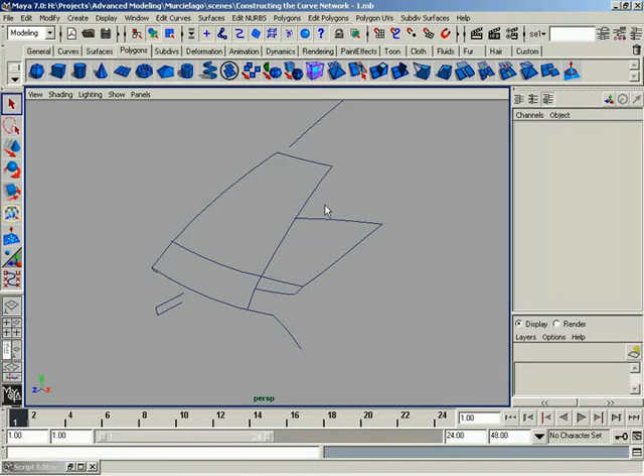Okay, so let's keep on building our curve network. All right. Now, I did notice at the end of the last video that I was losing a little bit of continuity with some of these curves. These should be straightened out a little bit more than they are. So I'm going to take just a few seconds and grab CVs on these curves and clean things up a little bit.

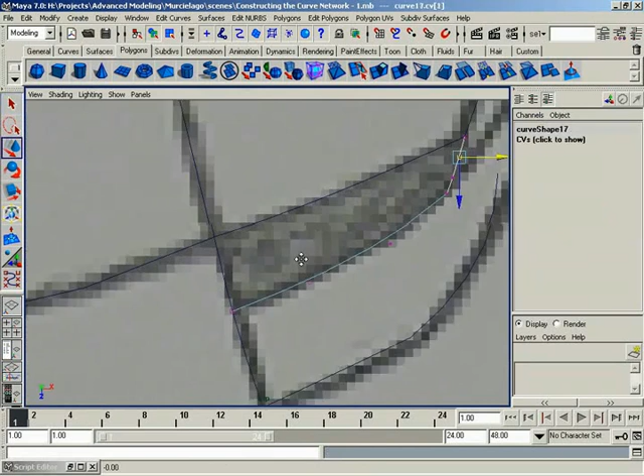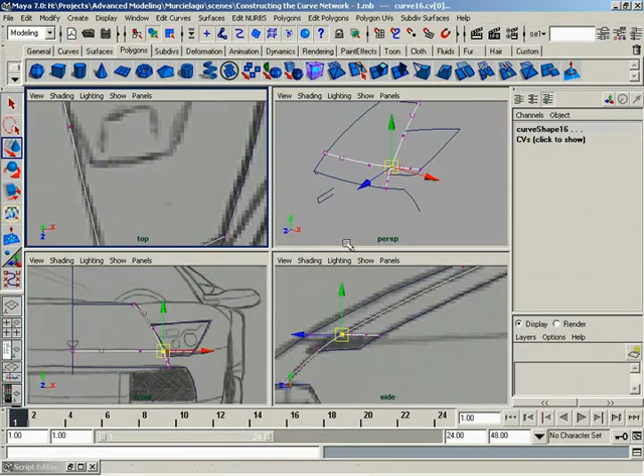Say over here, grab all 4 of these. Grab their end CVs and just kind of straighten that out. Okay. And let's grab the CV curve tool again and start working on the fender. And adjust in the front view a bit.

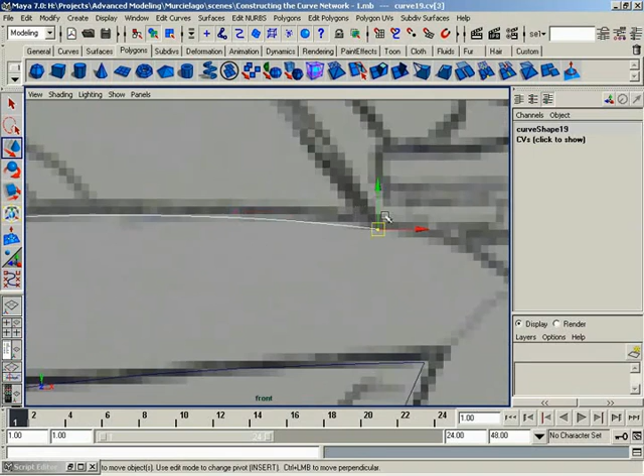Take a look up here at the front of the car. We have this kind of lip that goes up underneath, and down here on the edge. Let's go ahead and see if we can create that. So right around the grill? Yeah.

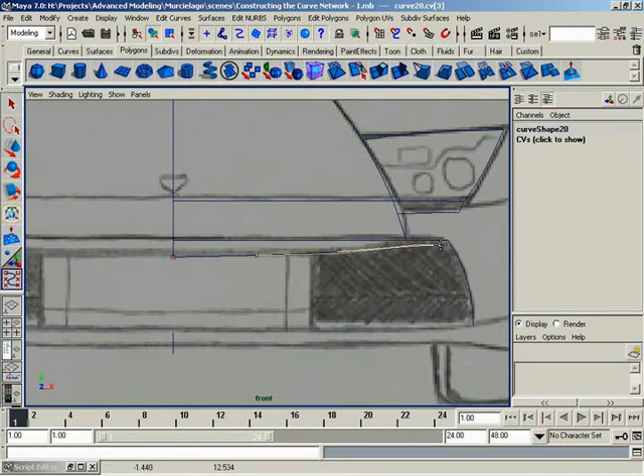And we're going to use the arrow keys and pick walk along the curve. In fact, let me double check here. It looks like I grabbed 2 CVs when I didn't really mean to. And let's just kind of double check on the image. We can see this area here, and it kind of slopes up there at the edge, so we'll leave that kind of pointed downward just a bit.

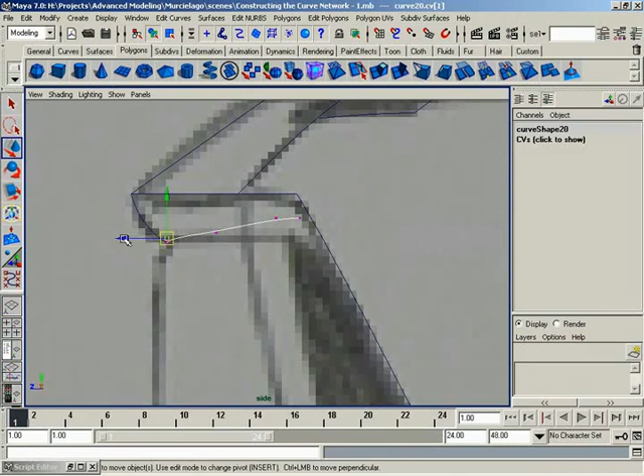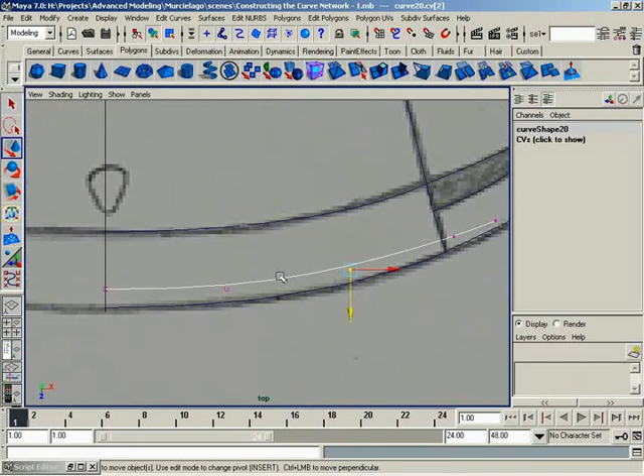And this is the second to the last CV, so what I'm going to do is make sure that it stays aligned with the first one in the Z-axis, so it'll stay nice and flat along there. Now what I'm doing here is I'm just kind of rounding this out based on sort of a best guess, if you will. Go into the top view, follow the flow of the curvature of the car, and just kind of make it look nice, is what that kind of amounts to.

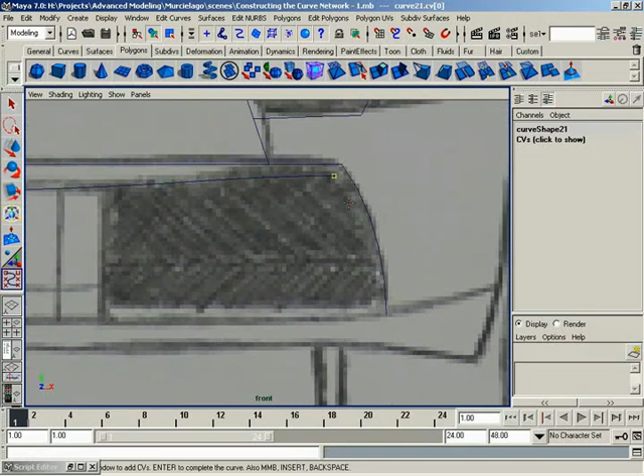All right, let's go back to the front view. Could probably tug this out just a little bit further. These can go up just a bit. Create another curve like so. Now, what line are you following? I don't see... There really kind of isn't one. But check it out. There's a little bit of thickness here. Oh, I see. Okay. That I just want to kind of get in place. So I'm just creating sort of a guideline.

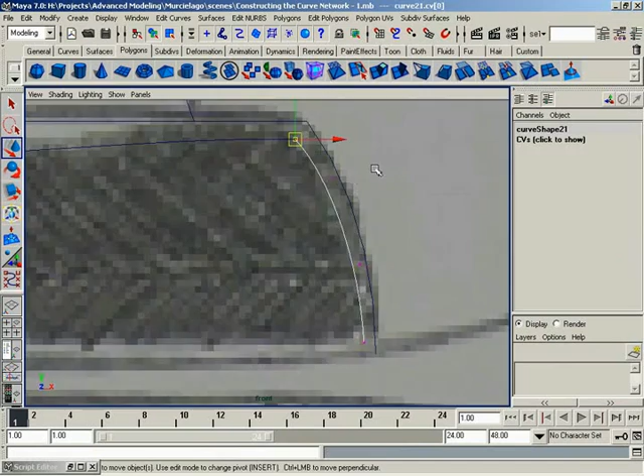As I was saying, there's kind of a difference between lines that you'll actually see on the model and then lines you're going to use for contour purposes. So this is just giving me something to base things on as I step inside. Because what I'm going to do is pull this all the way back a little bit behind that lip. You see, it's just a way for me to kind of keep track of the contour of the car. Oh, I see what you're saying. Okay. Kind of giving it a thickness. Yeah, exactly.

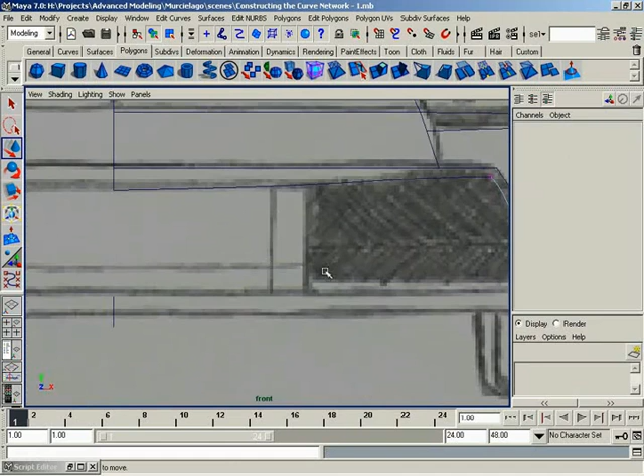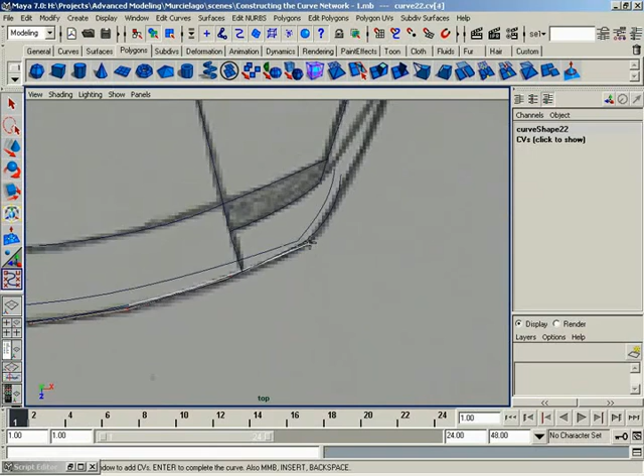So let's see. Up here along the front, we kind of curve outward. Now, this is sort of an interesting area. I'm going to snap right up here to the front edge of the bumper, if you could even call that a bumper. And we're just going to follow this right around the side of the car. I'm going to go ahead and put an extra point or 2 right here so I get kind of a corner right here in this area.

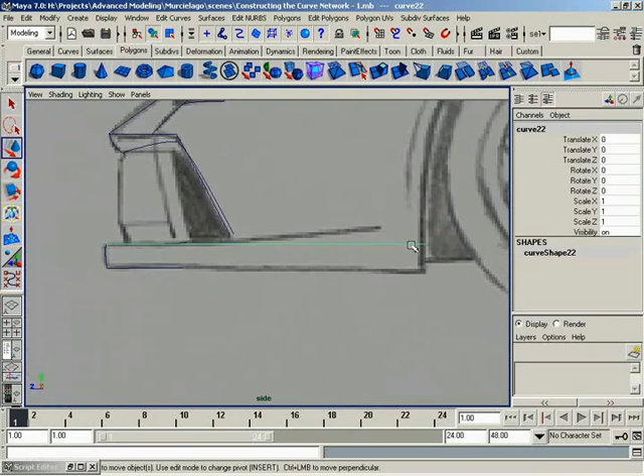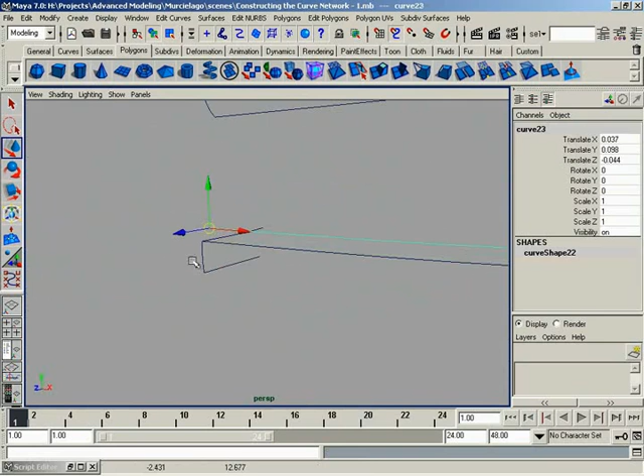Do the same thing here, just drop an extra point down. And actually, that's just about as far as I need the thing to go. I can probably take this CV and delete it out. Okay. Now let me take this curve, press Insert, move its pivot over. I'm going to hit Control D and duplicate it. Notice I can snap its pivot here to the base. Mm-hmm. And we'll snap this down like so. So now I have kind of a duplicate of that curve to get the bottom area of the bumper.

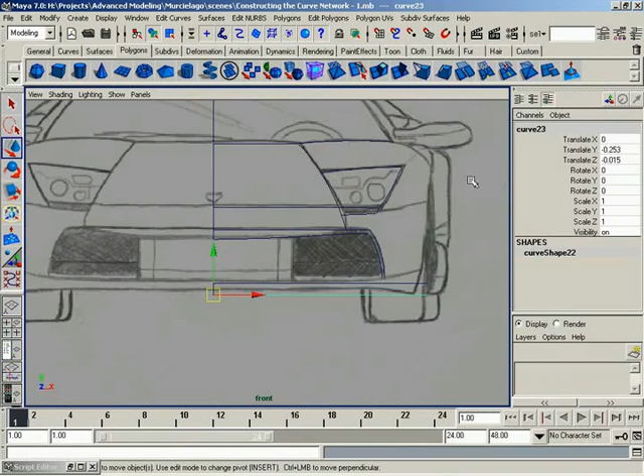All right, now from here, this little grill area in the middle of the car is so simple that I'm not really going to stress creating a curve network for it. We can probably improv that later on and get it dead on. So we won't worry about that too much. Although, it does look like I need to address the bumper and the underside of the car from here. Let's go over to our side view. And it looks like we have a bit of a downward sweep.

Uh-oh, look at this. If you ever see this happen, it's probably because your duplicate settings were set to something like instance. Uh-huh. Let me go ahead and delete out that curve that I duplicated. Go over to our duplicate settings, and we are set to instance. So let me reset everything. Forgot to reset your tools. Yeah, it happens.

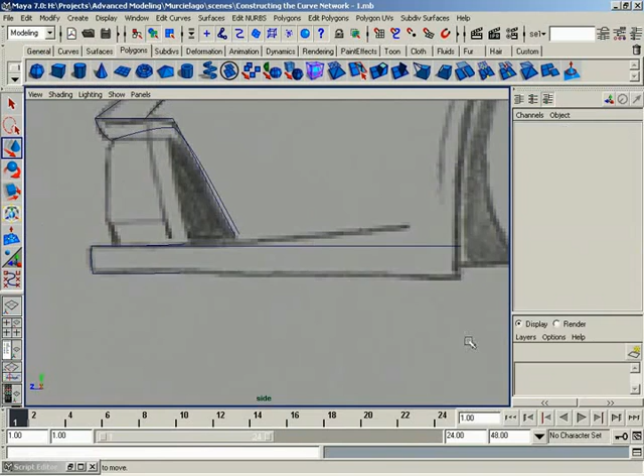So I'll take this one, and I'll shape this. Notice we're just kind of following the curvature here. Mm-hmm. And we'll duplicate, pull down, and this one will follow downward.

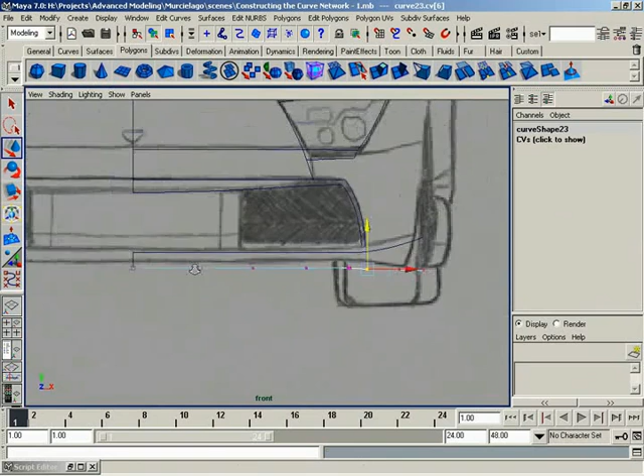So there's a little bit of a difference in our relative heights, so what I'll do is start averaging out between the two.

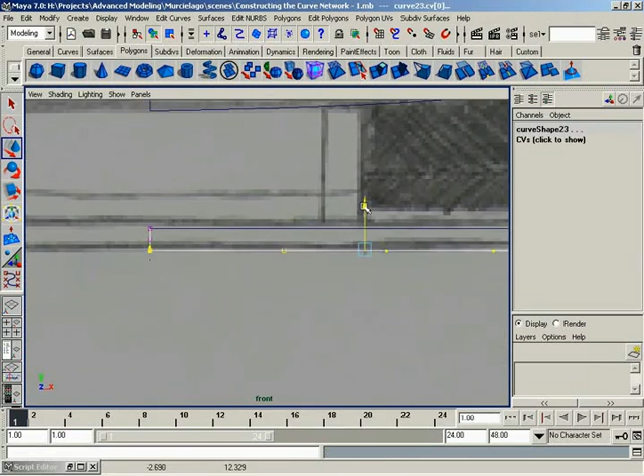Notice I'm just grabbing selections and tugging them up just a little bit. Nothing all that fancy, really.

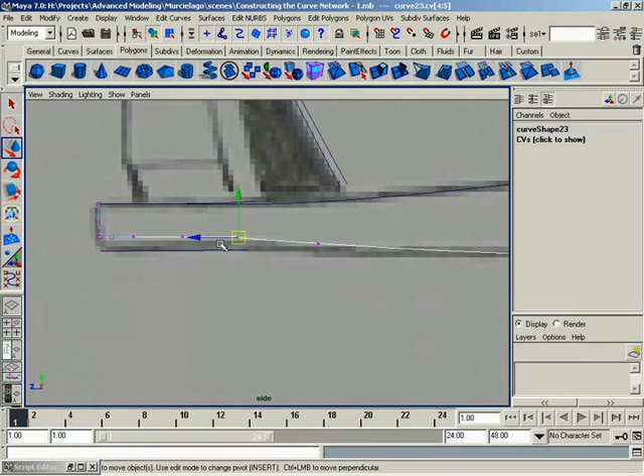And this bottom one we can, of course, pull in a bit. See how this lines up. Looks okay in the front view. Looks pretty good in the side view. But we are, again, just kind of averaging in between the two. So let's check things out in the 3D view.

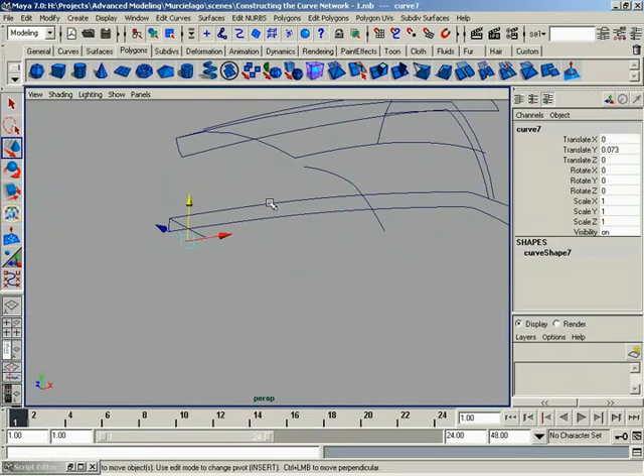And that's not too bad. Actually, it's looking pretty good. We'll grab this bottom curve, let me center its pivot so I can move it, and we'll tug it up. Now, the ends of your curves don't necessarily have to snap together, just because later on, once we create polygons, that issue will pretty much take care of itself.

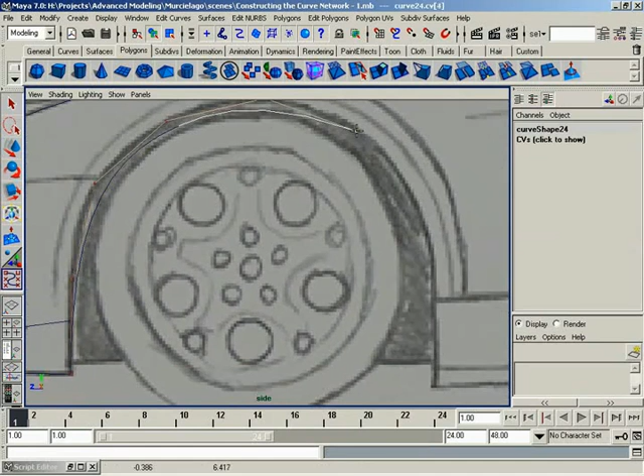All right, over here in the side view, let's create a cutout for the wheel well. Now notice I'm creating this with as few points as possible, and because of that, the curve is a lot smaller than what we really need, but that's okay. Because what we can do now, of course, is just adjust those CVs and make it all line up.

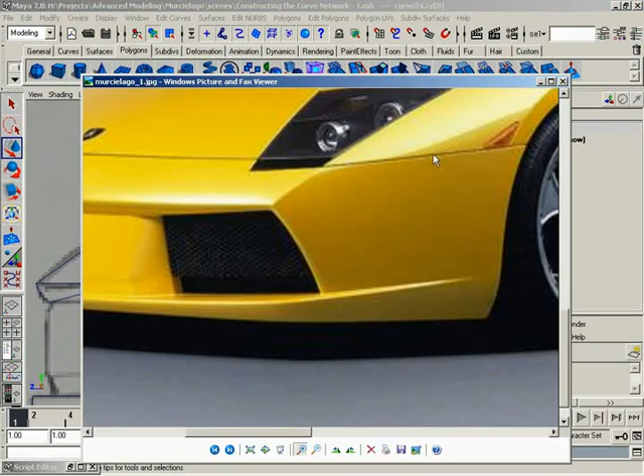Okay, now we have an edge that, according to the image, goes from right underneath the little black area under the headlight and cuts right back to here. So let's go ahead and get that in place.

The way I'm going to do this is to create a NURBS curve with the EP curve tool. We'll curve snap it here to the bottom, and then I'll just curve snap it straight back like so. In fact, hang on, before I jump the gun...

I should probably edit the wheel well a little bit. I think it's in the wrong spot. Yeah, it might be. Makes for an interesting car, though.

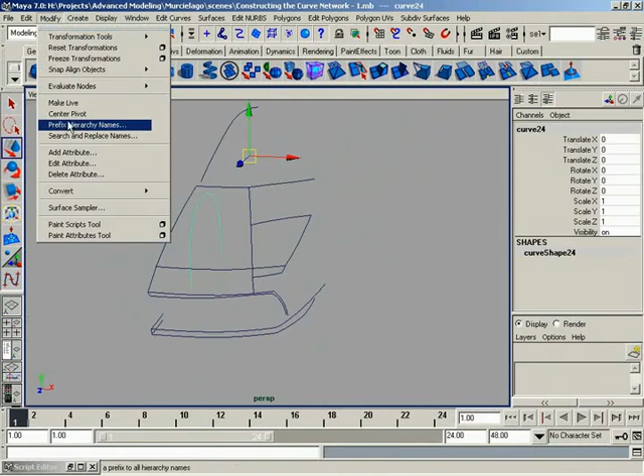So let's center its pivot, we'll move it out here. Now, we don't have a whole lot of reference as to where this is supposed to go, so we have to kind of wing it a little bit. So we can grab this vertex, pull it in like so, and now I'm just going to pick walk up the curve and just follow that curvature.

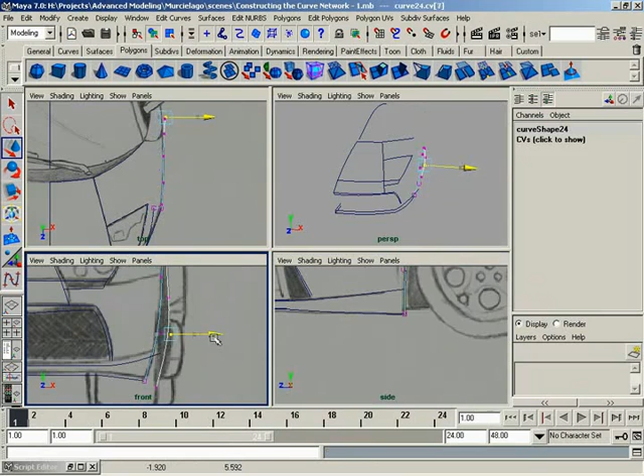It also kind of hugs in a little bit at the bottom, which is just what we want. So it's looking pretty good up there in the corner. All right.

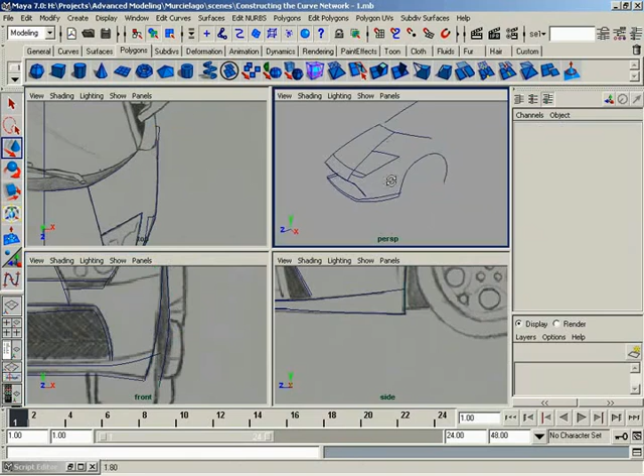And now let's get that kind of fender separation line in there. Looks like that line might be just a little bit off on the drawing, which is okay, because we're referencing what's really there.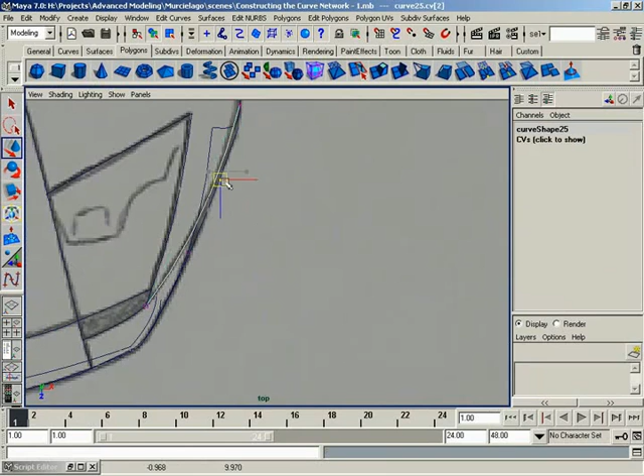Okay, looking good so far. Let's come over here to the side view and continue working on the fender. Now, the car is going to be broken up into a lot of pieces. Looks like we've got a contour line here. Right, that shows where the fender kind of flattens out, as opposed to actually having a separate crease there.

Let's see if I can kind of demonstrate this. Here you go, and you can see how the fender kind of gets flat there. So what we're going to do here is I'm going to duplicate this curve, scale it out, grab curve points here and here, holding down the Shift key, and then under Edit Curves, we'll come down to Detach Curves.

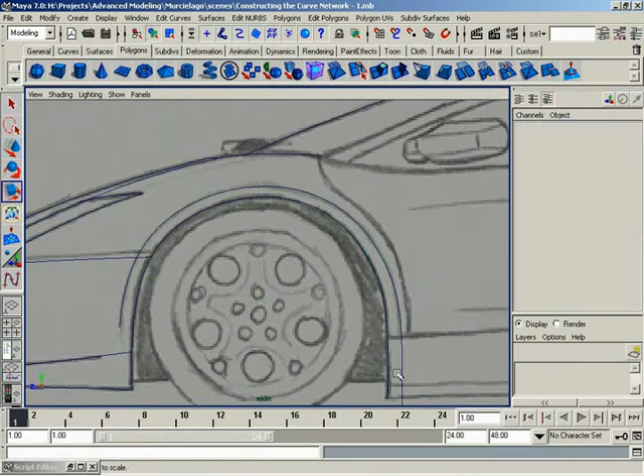And we just take our excess and delete it. All right, now I'm going to grab the CV Curve tool again, and we'll snap all the way to the end of this fender curve that I created earlier, and let's start creating the curvature that wraps around the bottom of the fender, or the back of the fender, anyways. Like so.

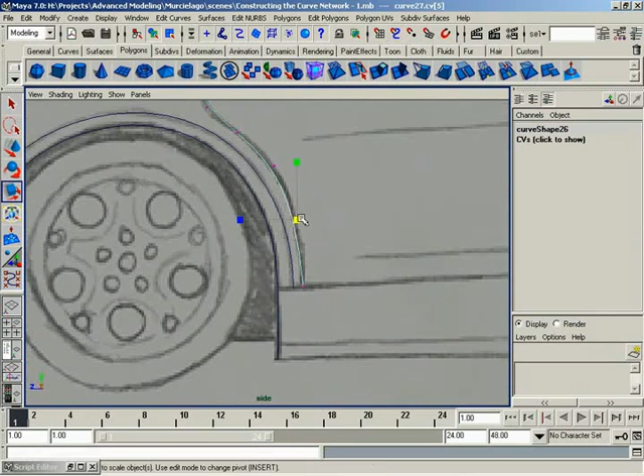Now, of course, we need to kind of clean this up in the front view. So this is one of those places where you're going to have to kind of eyeball it, see where things are placed.

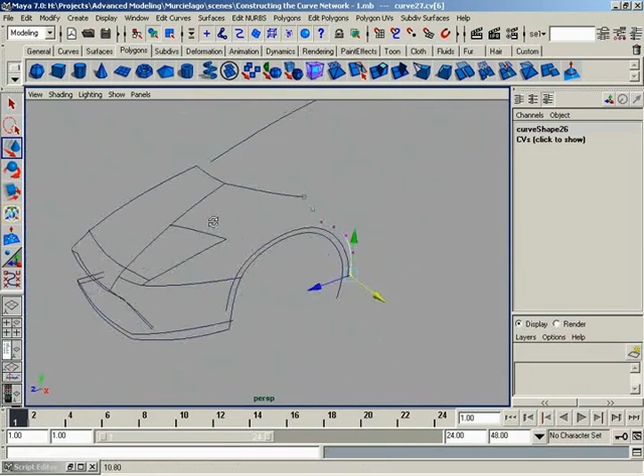I think I'll take this last CV and tuck it in just a little bit more. But now we do have the bulk of the main fender at the front here outlined, as well as all these areas in here. It's starting to look pretty nice. A little bit of editing up here. I'll go ahead and pull this back up against the wheel well.

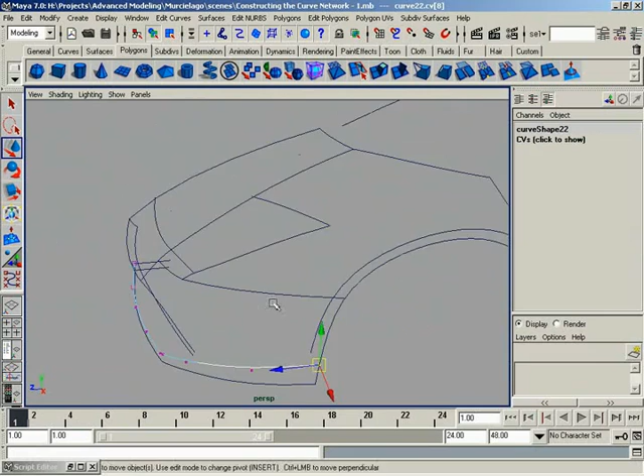All right. Now we have sort of an interesting shape as we get here along the base of the car, down here around the side skirt. And if we grab our big image, we can kind of see why it looks so interesting on the picture. And it's because we have this kind of thing here chopped out like so. Right.

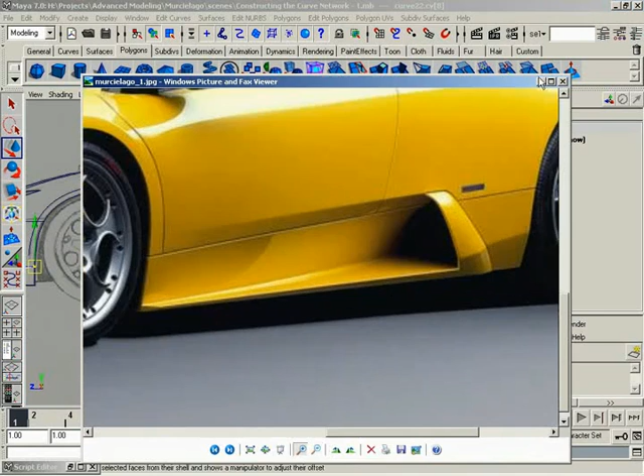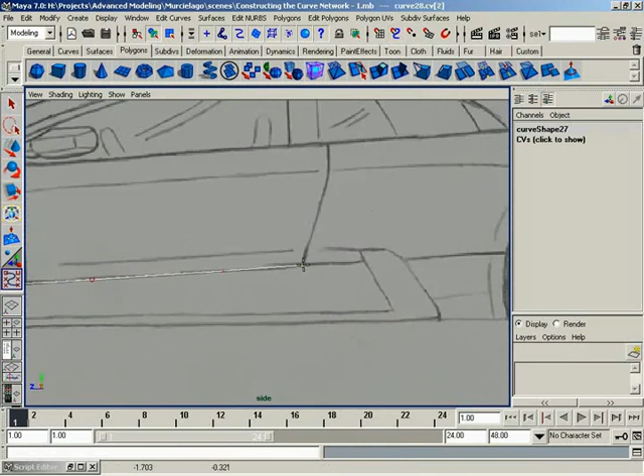So let's go ahead and grab our CV curve tool. And I'll start off just by making a split. Now notice I'm going to stop this right here underneath the door. Right, you have an option. You can either stop right here under the door, or you can pull back and keep everything in line, but it'll probably be easier later on if you chop right here. You don't have to, it's just kind of a thought.

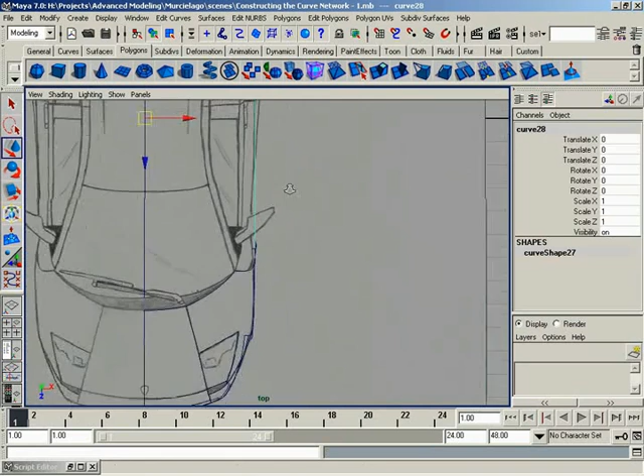All right, now we need to kind of outline this shape. First, let's make sure that line we just created is kind of in the right spot. If we look in the top view, notice how it just kind of shoots straight back. It doesn't really follow the contour of the car at all. Also, notice how we've broken away from some of our contouring here. So we need to kind of clean this up a little bit. This all boils down to checking all of your different image planes.

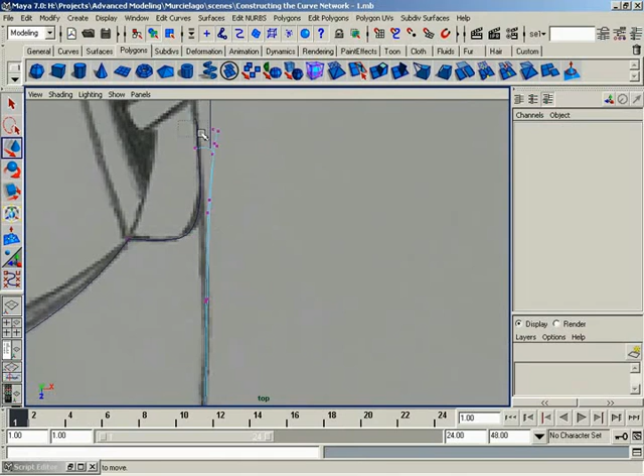Pull all these inside. Grab multiple curves at once and start tugging these in a bit. See how that's starting to look over here. It's pretty nice.

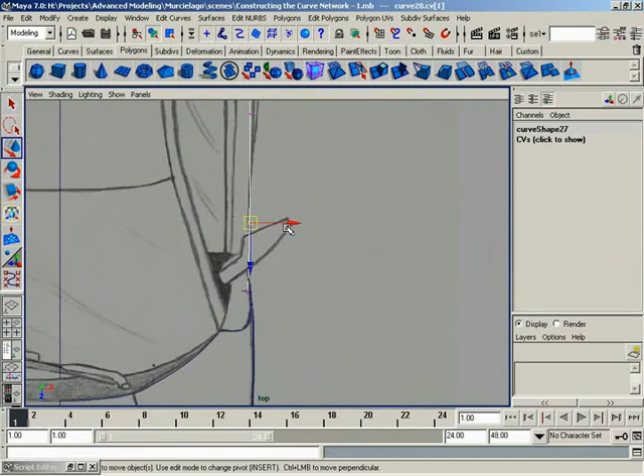Snap this back to the curve like so, and then we'll come up here to the top view, and then I'll just start pushing these in the x-axis so that they line up with the door. Now notice I'm ignoring this little area out here because that's actually the wind scoop on the side of the car. Move this just a little bit. Follow that curvature as best we can.

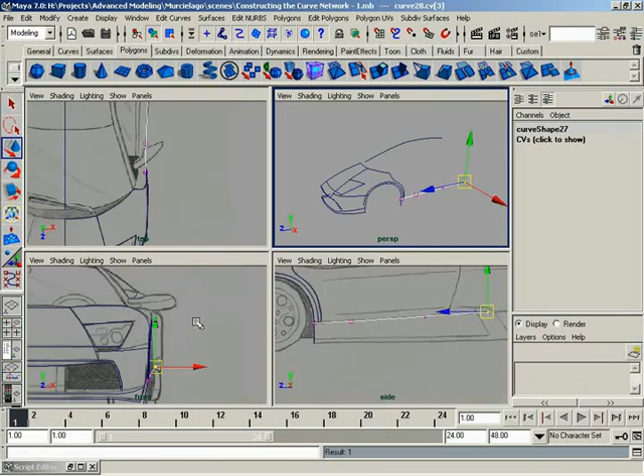Come up here and create a curve along the top of the door. And of course, take a moment, edit this out.

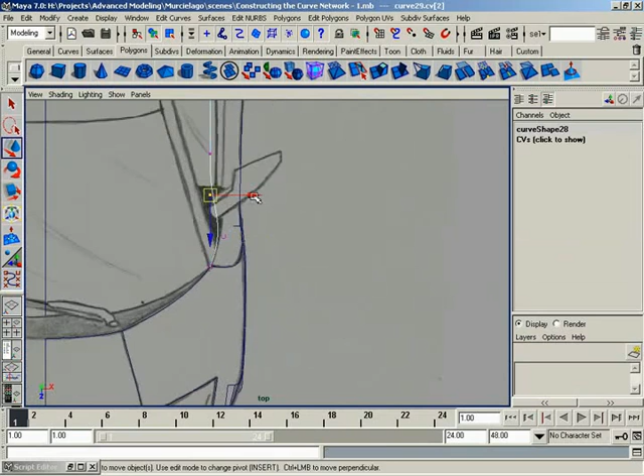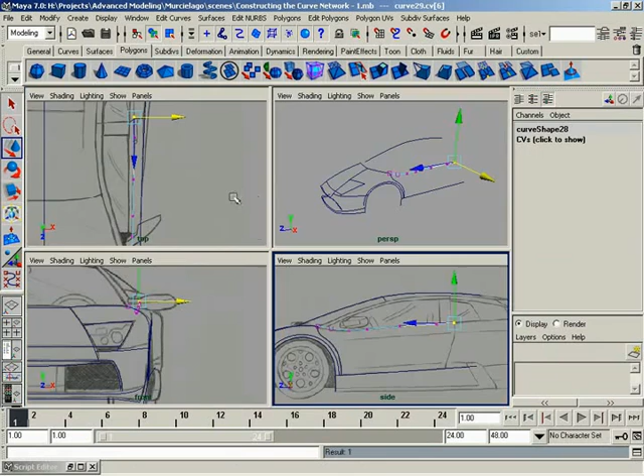Now, what line am I following? There's kind of a ridge that flows along the top of the door there. So we're just kind of moving along that, because from the side, all you'd be able to see is the top of that ridge. The door itself actually is going to indent downward slightly as it goes down to the window. So we're just kind of following the outward edge for the time being.

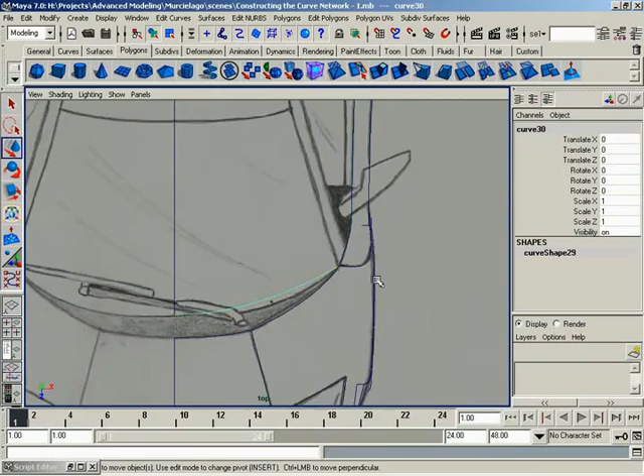Let's go ahead and create a couple of curves to outline the windshield while we're here. So I'll snap it here to the base of the windshield. Now hold down Shift to create my second point. That's just going to make sure these 2 points stay parallel, which will keep my curve nice and flat. Let's see, 4 points will probably do it just fine. I guess we really just need to kind of clean this up in the top view, and it should be okay.

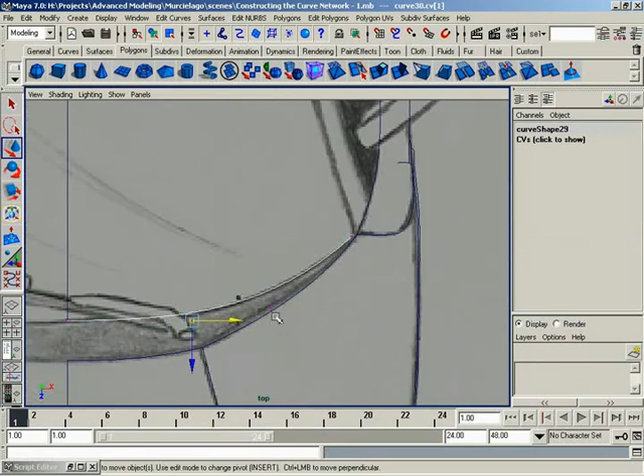About like so. Okay, and we'll snap to the end of this curve. And we'll go up the blind spot here. Go ahead and stop when I get to the top of the windshield.

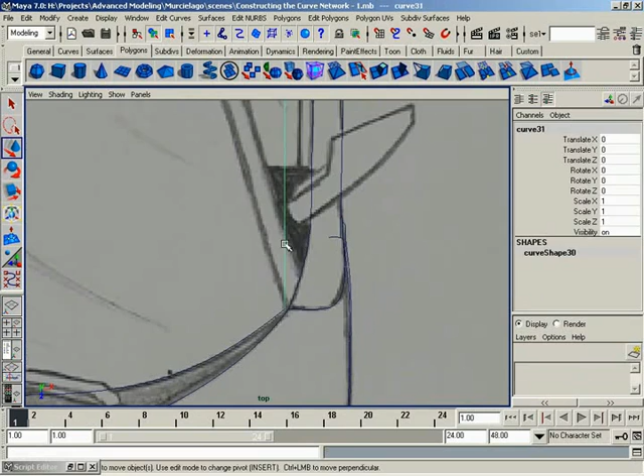And we'll snap up here. I'll just create another curve that goes along the roof line. And of course, that's going to need some cleaning.

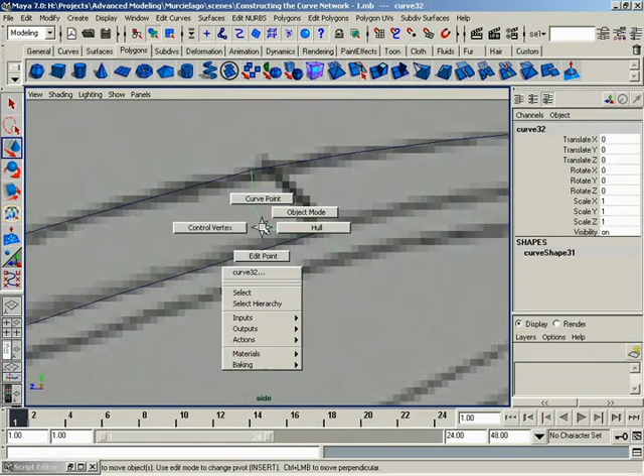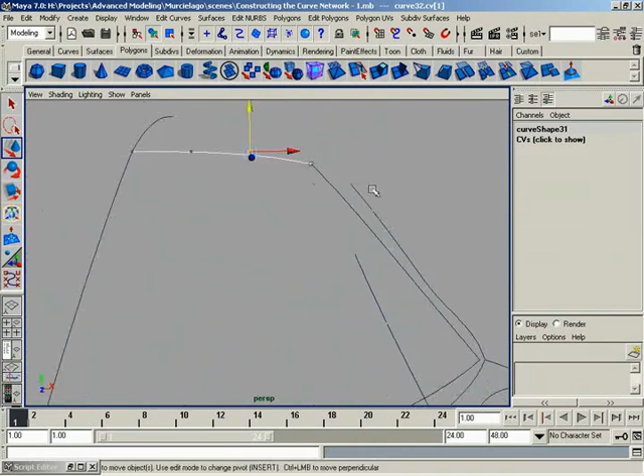Take this second CV, let's just snap it in Y right up to its next door neighbor, and then we can just kind of position this one arbitrarily almost. Now, we did notice earlier on that there is a little bit of a difference between the line here and the line here on top. Right, so I'm going to assume that the top is correct. It looks pretty good, yeah, it's coming along nicely.

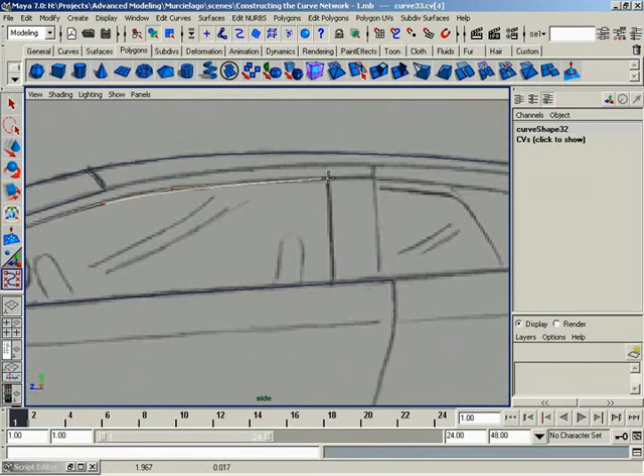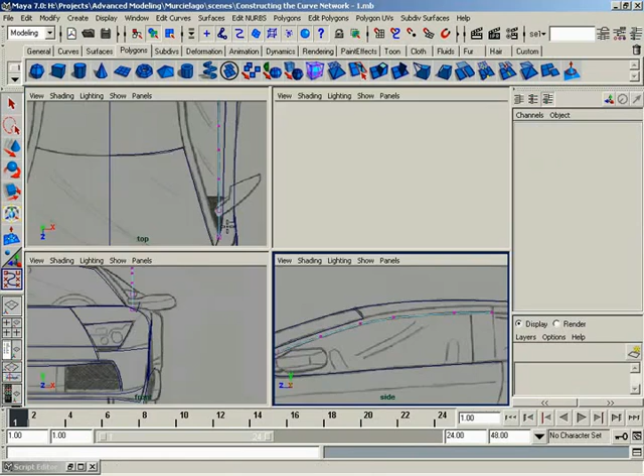And I'll curve snap a new curve in here. We'll follow the underside of the blind spot. Like so. Okay. And clean this up a bit here in the top view.

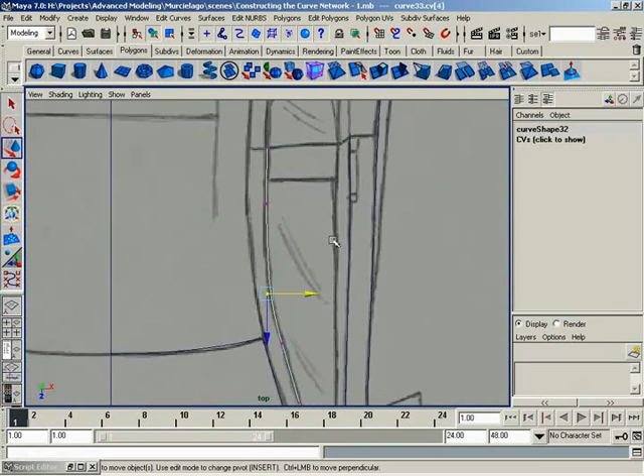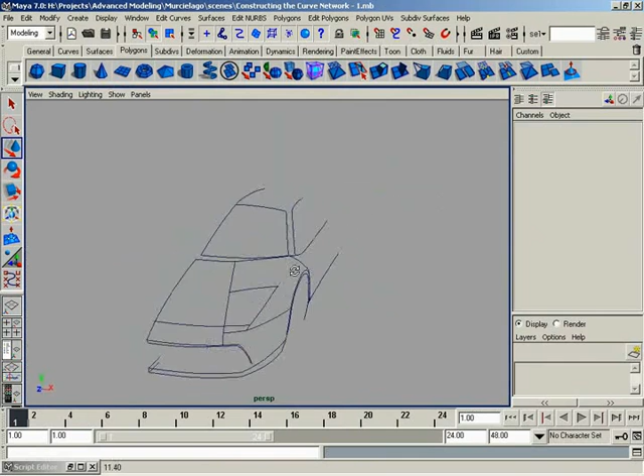And let's go ahead and just kind of see where things are. That's looking pretty nice. Hopefully you'll be able to see what we're getting at now. Yeah, I'm sure by now it's kind of starting to make sense, because this is already looking like a line drawing of a Lamborghini. So this will be a nice basis from which we can create our model later on. So I'm going to go ahead and end this video here, and we'll continue this in the next video.